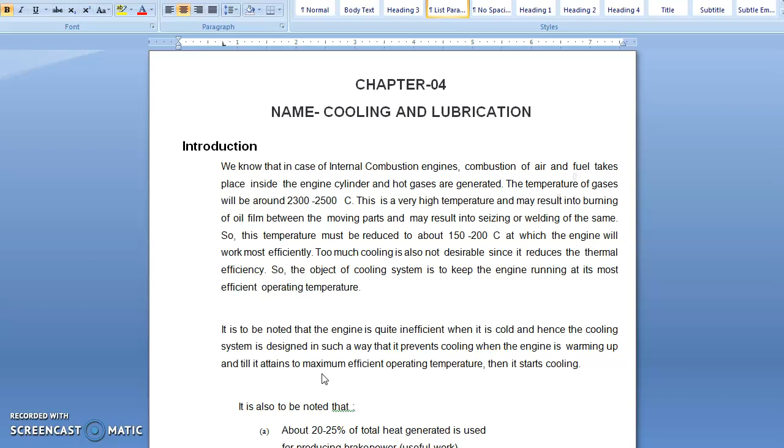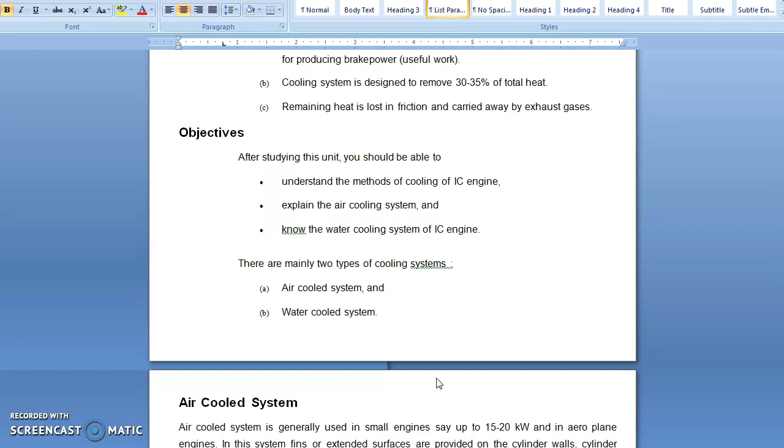So let us discuss. Here it is written: what are the objectives of cooling? In this cooling method, the objective is to prevent the seizure of the engine and to increase the efficiency. Basically in internal combustion engines, we use two types of cooling systems. One is the air cooling system and the next is the water cooling system.

So let us discuss air cooling. The air cooling system is generally used in small engines, say 15 to 20 kilowatt, and also in aeroplane engines. In this system, fins or extended surfaces are provided on the cylinder walls or cylinder head. Heat generated due to combustion in the engine cylinder will be conducted to the fins, and when the air flows over the fins, heat will be dissipated to air.

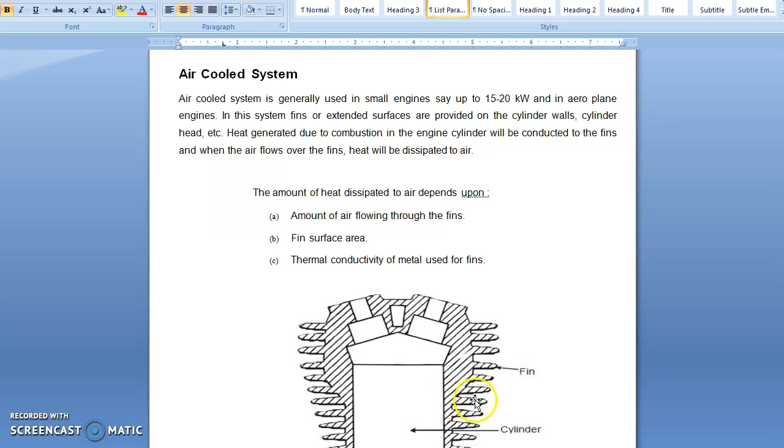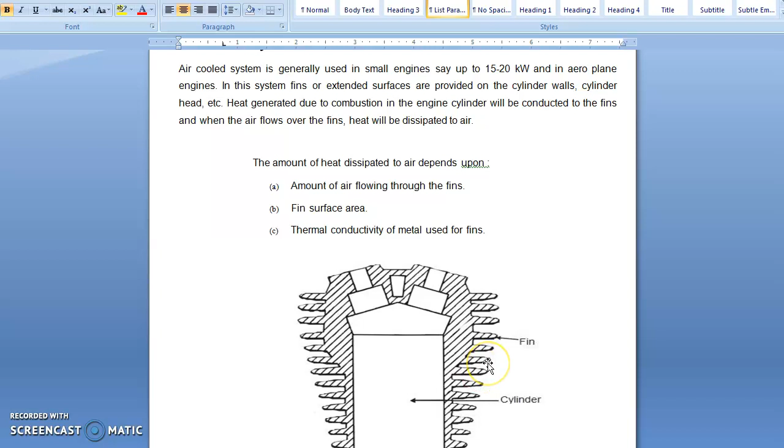The amount of heat dissipated to air depends upon three factors. Number 1, amount of air flowing through the fins. Number 2, fin surface area. And number 3, thermal conductivity of the material used for manufacturing the fins. So it is very simple. Fins are cast on the outer surface of the cylinder, and when air flows over them, the air cools the engine. So let us discuss the advantages of air cooling.

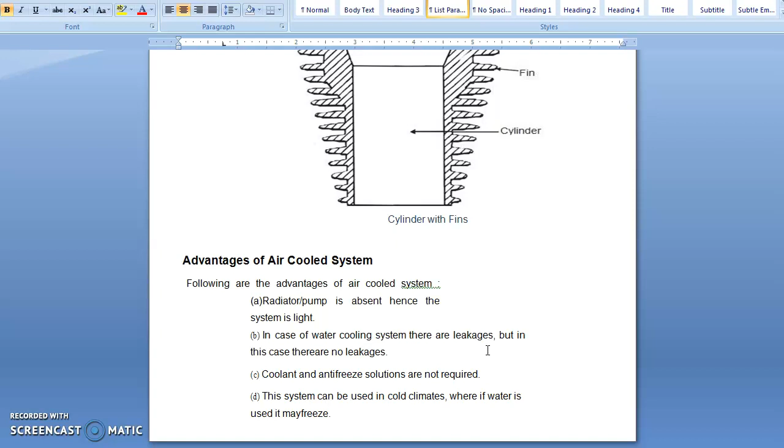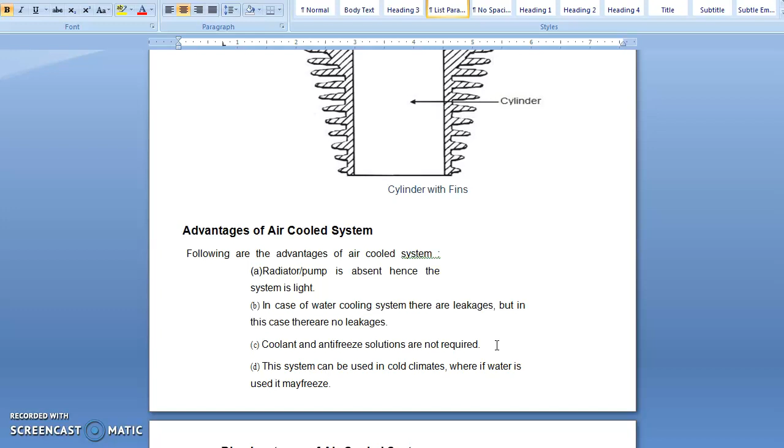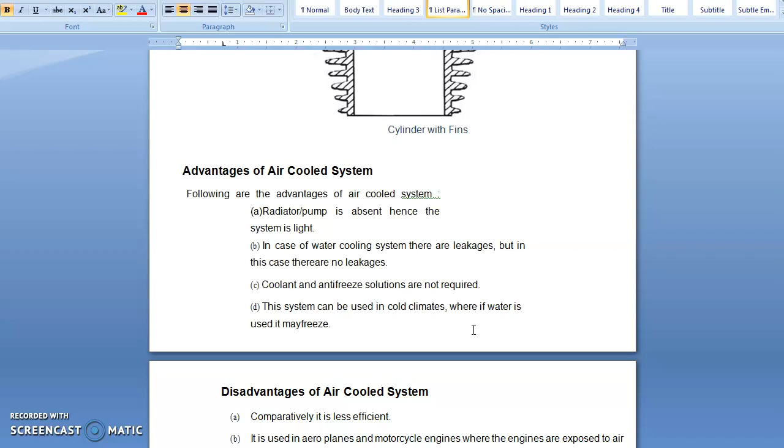Here only fins are there, so no radiator, no pump. So the cost and weight of these engines are generally lower in comparison to water cooled engines. In a water cooling system there are chances of leakage, but here we are not using water, so there is no chance of liquid leakage. Air cooling can be used in areas where water is not easily available or is costly. Also, in some areas of the world water is converted to ice, so in those places the air cooling system is also very applicable. Now let us discuss the disadvantages of air cooling.

Comparatively, it is less efficient. Noise may be created. And another thing, it creates uneven cooling. That means, suppose a vehicle is moving forward. If you compare the engine in two halves, the part of the engine placed in the backward position is comparatively more heated compared to the frontal one. So you can say it is uneven cooling.

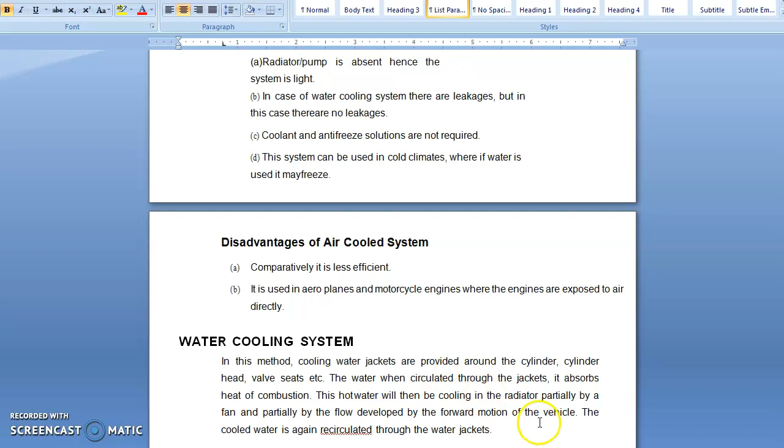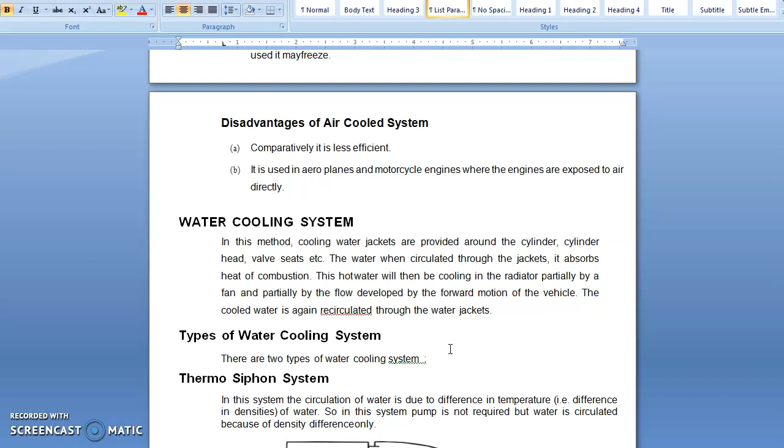Now let us discuss the next cooling system, which is known as the water cooling system. In this method, cooling water jackets are provided all around the cylinder head, valve seats, etc. The water, when circulated through the jackets, absorbs the heat of combustion. This hot water is then cooled in the radiator partially by a fan and partially by the air flow developed by the forward motion of the vehicle. The cooled water is again recirculated through the water jackets.

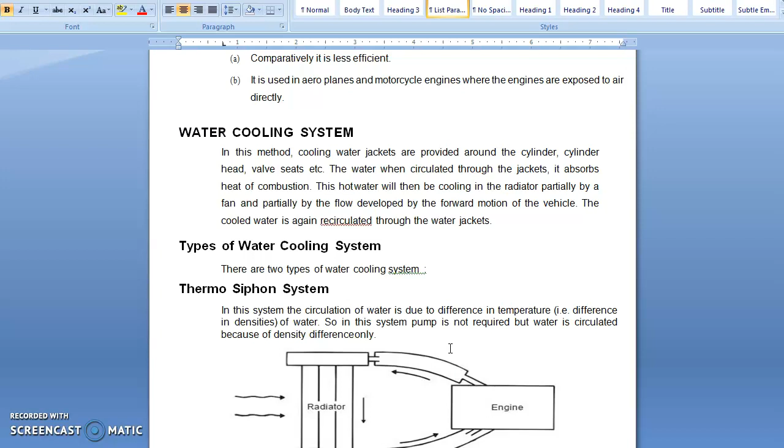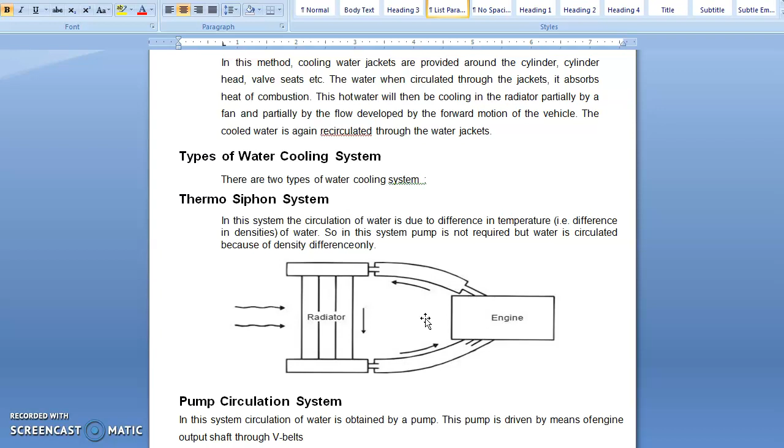Generally, this water cooling system is subdivided into two types: number 1, thermo-siphon system, and number 2, pump circulation system. The parts generally used for water cooling are radiator, pump, hose pipes, thermostat valves, etc. Thank you.